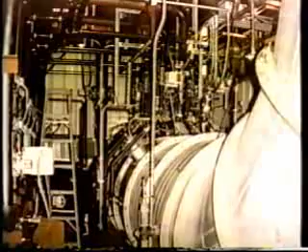IET, International Environmental Technologies Incorporated, is an innovative company involved in the worldwide distribution of leading-edge technological equipment and strategies for the final disposal of municipal and industrial solid waste. IET fulfills a growing global need for commercially proven new approaches to solid waste disposal using methods and equipment which are low cost, efficient, effective, and environmentally responsible.

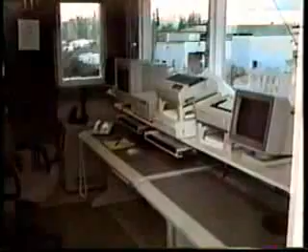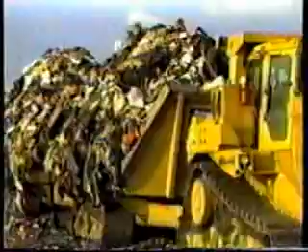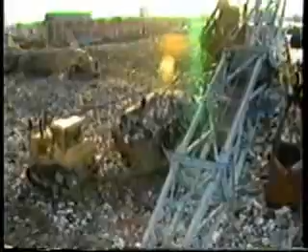IET's technological solutions to today's solid waste disposal problems eliminate many of the difficulties and expense commonly associated with conventional waste management options such as landfilling, mass burn incineration, and RDF, refuse-derived fuel production. We can no longer rely on these outdated, conventionally available methods of disposing of solid waste. New strategies and technologies must be implemented now to better address this problem for today and the future.

Increases in population in any community result in corresponding increases in the production of greater volumes of solid waste, which must be disposed of. Development of international markets for packaged goods and foods have also dramatically added to the global solid waste problem in the past 10 years.

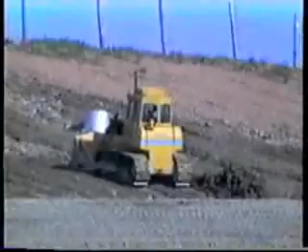For decades, the international final waste disposal method has been the landfill. Millions of tons per year buried in virtually permanent storage underground around the globe, creating numerous long-term environmental problems. Windblown trash, groundwater contamination, methane and other toxic gas emissions, subterranean fires, permanent loss of land use. IET has a more sensible and affordable solution to this solid waste disposal problem.

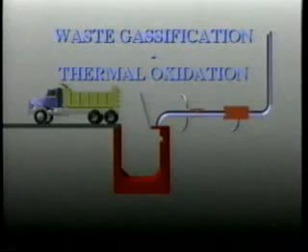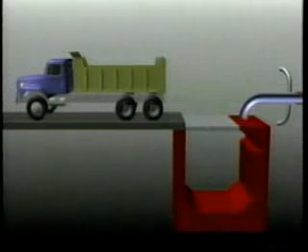IET's thermal oxidation process. Waste gasification through thermal oxidation. The process is very simple. Delivery trucks offload waste material directly into the system's primary waste gasification cell. No pre-sorting or pre-processing of the waste is required, other than the removal of white goods, refrigerators and other household appliances, and automobile bodies and engine parts.

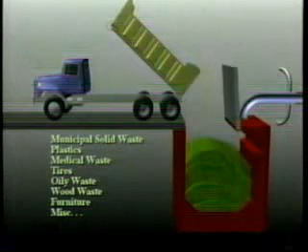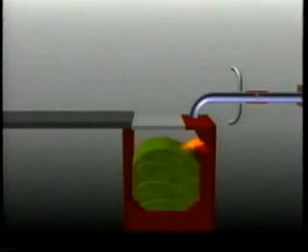The system will accept all types of municipal solid waste, plastics, medical waste, automobile and truck tires, oily waste, brush and lawn waste, furniture, and so on. High amounts of moisture in the waste load do not affect the operation of the system. When that cell is filled, its load access door is closed and the system is activated. A diesel, natural gas, propane, or other fuel-fed igniter burner is used to raise the interior temperature of the cell to approximately 800 degrees Fahrenheit.

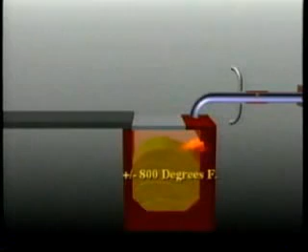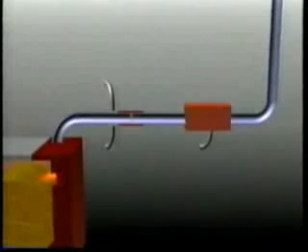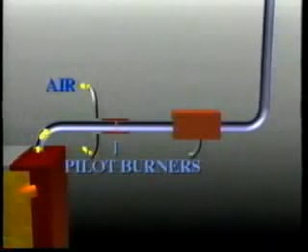At this temperature, in an oxygen-starved environment, the combustible materials in the load convert from solids and liquids to a smoke and dust-free gas. The gas is vented into a secondary gas processor. It is mixed with room air, and this gas mixture is ignited by a set of pilot burners. The result is a stream of hot air, predominantly composed of carbon dioxide and water vapor. This hot airflow can be easily reclaimed to produce hot water and steam at virtually no additional cost of operation.

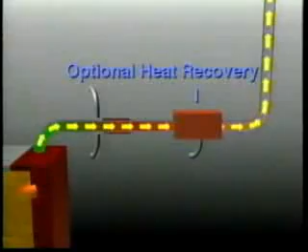In systems processing over 200 tons of municipal solid waste per day, the addition of conventional steam turbine electrical power generating equipment is cost-effective and efficient. The IET solution. The thermal oxidation process provides a number of significant advantages over other waste disposal strategies. A solution which provides complete disposal of over 90% of the incoming municipal and industrial solid waste stream.

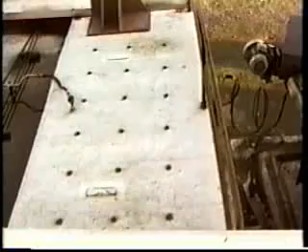A solution which eliminates the need to pre-sort or pre-process any of the incoming waste, and which is not affected by high moisture waste. A solution which provides a total installed facility at considerably less expense than other conventional waste treatment and disposal methods of similar size. IET's waste gasification technology, thermal oxidation process, has a long proven record of exceptionally clean air emissions, which are several orders of magnitude cleaner than the most restrictive United States Environmental Protection Agency standards for municipal solid waste incinerators.

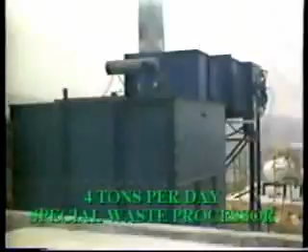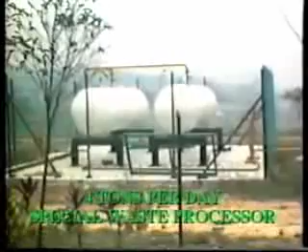The IET waste gasification process requires an operating staff of less than half of a conventional waste incinerator with the same daily volume capacity. Operators do not need advanced education, engineering degrees, or other specialized training beyond that which IET provides. Aluminum, steel, and other metals and glass are 100% recoverable from the fine inert ash remaining at the end of the process.

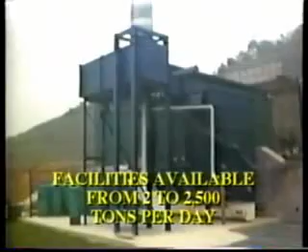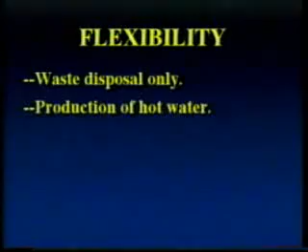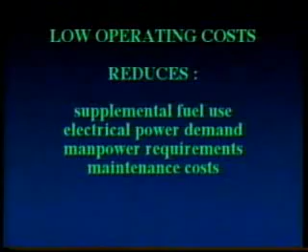IET waste gasification is a cold process which virtually eliminates the safety problems associated with conventional mass burn waste incinerators. The thermal oxidation process can be used for waste streams ranging from a few hundred pounds per day to the thousands of tons per day volume. This process can be employed for waste disposal only, production of hot water, production of 60, 90, or 120-pound steam, and electrical power generation. The thermal oxidation process requires only a fraction of the supplemental fuel, electrical power, manpower, and ongoing maintenance and support expense as conventional mass burn incinerators. In many cases, the thermal oxidation process can be less expensive per ton than landfilling.

Better answers to the problems of municipal waste disposal through superior technology and planning, offered by IET, International Environmental Technologies.